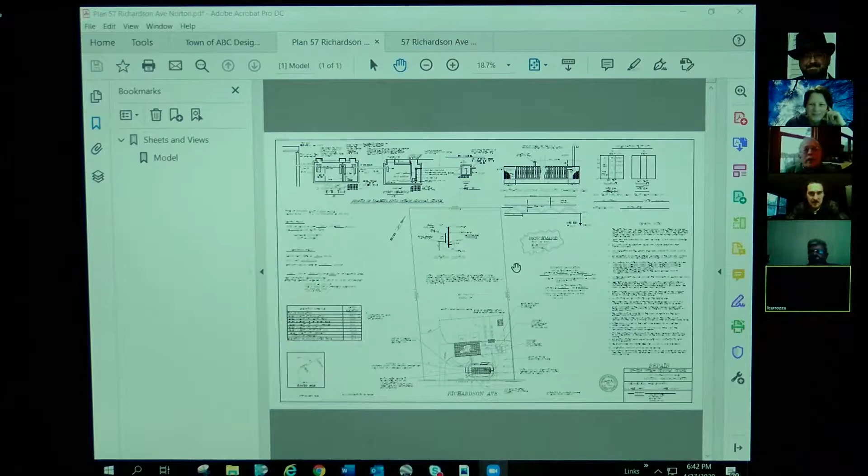It worked a little better last time. Did that work? Oh, there you go, there it is, there we go. All righty, very nice, thank you Lisa. Hey, sure thing. All right, I'm just trying to zoom in a little.

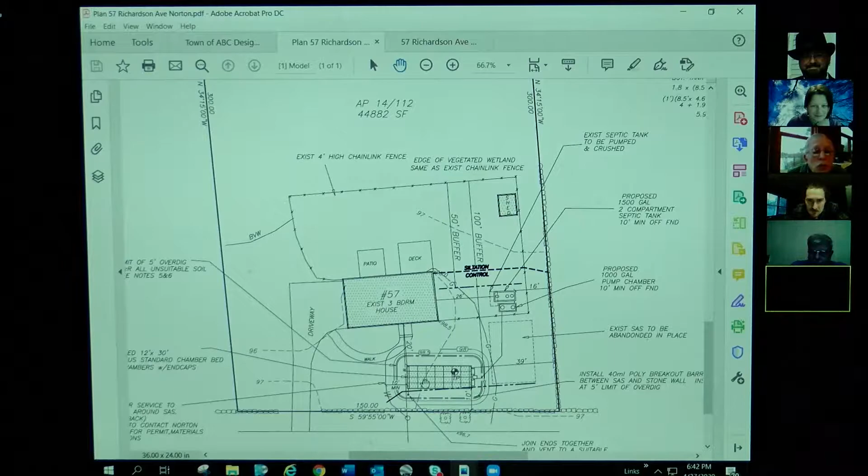So it looks like the wetland is along the fence, along the back of the fence, and then it comes to here. The existing system is here. The leaching fields are going to be replaced in the front. Siltation control here.

So if I can just comment, the wetland is off to the right, off to the left as we see it on the plan. This is the only thing that says BVW, then there's a note that says it's coincidental with the back of the fence, I assume is back here. Yes, I see.

But I see these two lines here, 50-foot buffer and 100-foot buffer, what do those refer to? So they're measuring from the fence. I don't know why the 50 foot, but they did a 50 foot. Can you hear me? Yep. Yeah, the 50 foot, I put the 50 foot on every town. Some towns want 50 foot, so I just showed 50 foot.

So just so you know where we're at, the 50 foot and the 100 foot, the leaching, everything is within the 100 foot. The leaching field is about 90 feet off the wetlands, and the tanks are about 55. So this is the buffer, 100 foot buffer from the fence. Yeah, it's a fence, it could be further in, but over the years they've maintained it, so it is the fence, in my opinion.

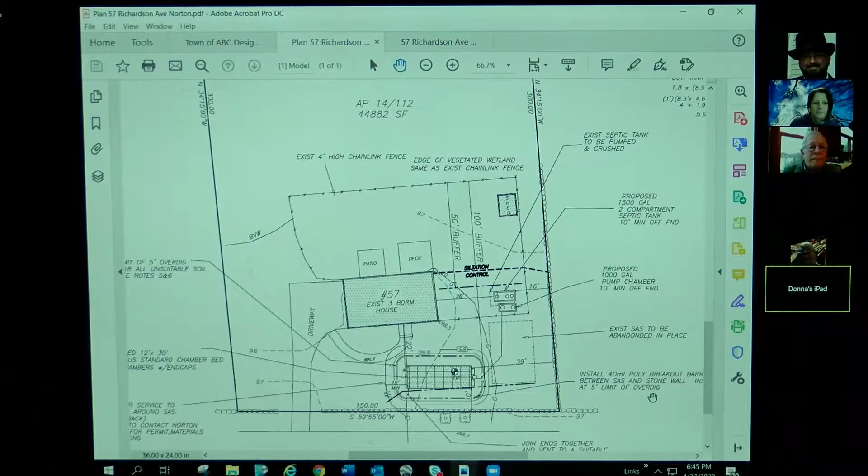Siltation controls are not really needed here. Is that what anybody else is thinking? No, they should have sediment controls. Oh, I see, it's installed there. Yeah, it comes here - I'm just showing a silt sock along from the stone wall on the side to the back of the house.

The actual work is probably going to be less than a week, but at least it will be there in case any rainstorms come up. In case they have to stockpile any material they excavate - in this particular case, there should be no stockpiling since they have to take it out. They have to replace some of the stuff in the front with sand, so they're just going to put it in trucks and take it away back and forth. But you're right, it's there in case there will be a little piling from when they put the tanks in.

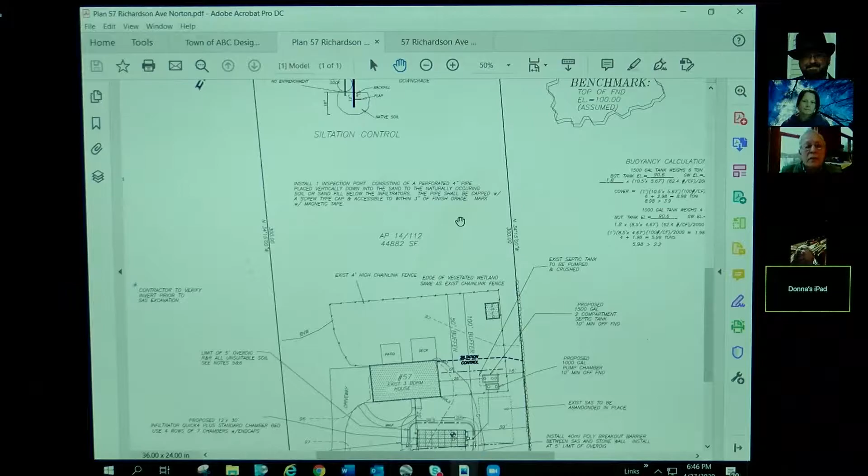Jennifer, do we need to see the photos of the site? Are we all set? You could put those up. If I knew how - wait a minute. You stop share first. Do I have to do that every time? Really? That's annoying. Okay, do you want me to try it?

Hold on. So wait a minute, where did that picture go? Oops, that's not it. Giving away company secrets. Is that - there we go.

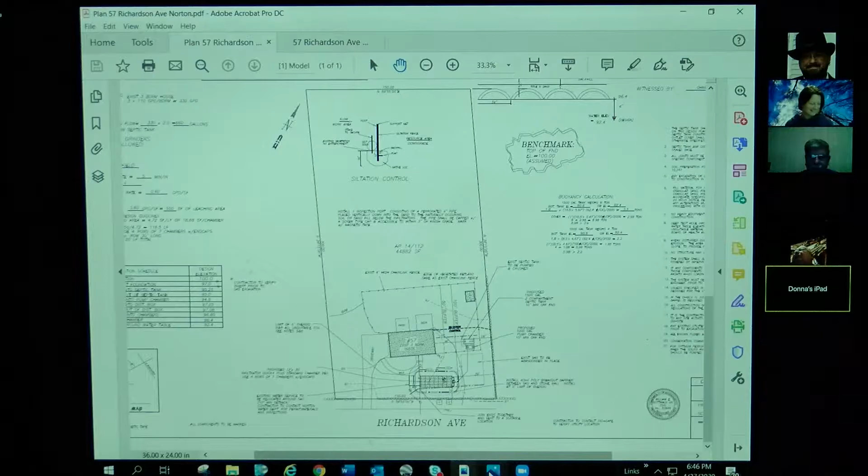All right, so I need to ask if there are any members of the commission with specific questions. Dan Doyle, any questions? I do not. And Ron? No questions. And Gene, any questions? No, not at this time. All right, and Dan Pearson? No questions. And Lisa, I'm assuming you don't have any further questions. All set.

All right, so we do have a number - it seems to be not terribly complicated. Is this something we can consider closing at this time?

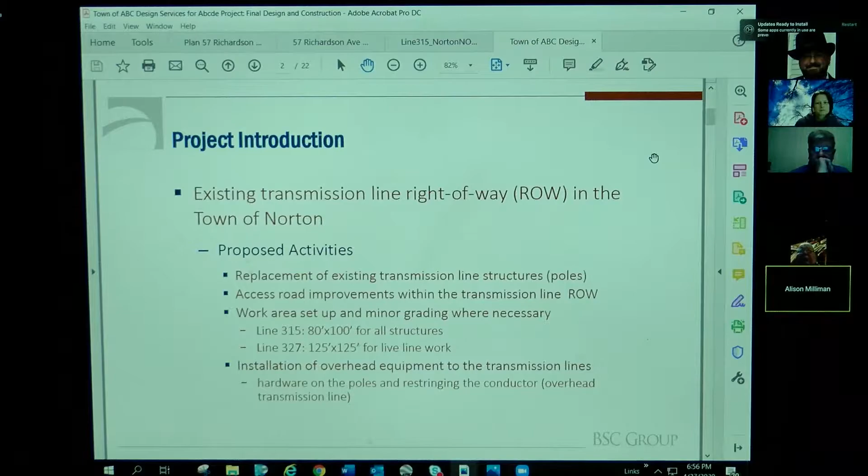Here I've just provided a screenshot to demonstrate what the existing transmission line right-of-way looks like as it crosses through your town. This is a shot of the transmission line right-of-way from Harvey Street.

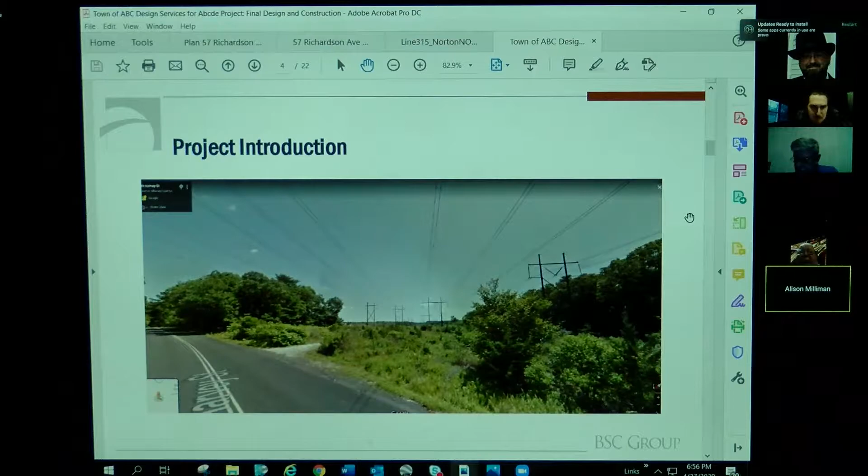Are these concrete footings or piers? Yes, certain structures are required to be installed on larger concrete foundations. Those are the dead end structures - they need to support more overhead strain. There are also angle structures. When we get to the plan set I can point out where those are in your town. I was wondering, do those come precast? No, they need to be poured on site. That's part of the reason why we have some access road improvements - they may need to refresh the stone entrances because they'll need to get concrete trucks in there to pour those.

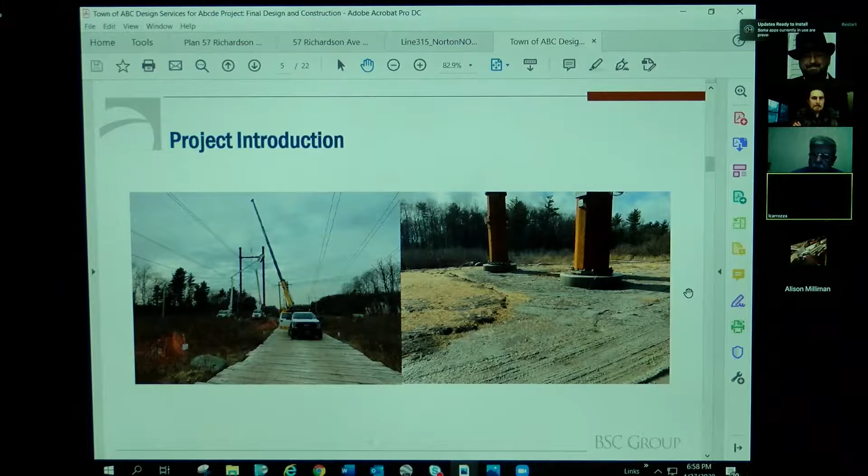Project activities are proposed within resource areas regulated by the Wetlands Protection Act and the Town of Norton Wetlands Protection Policies. We have work occurring in bordering vegetated wetlands, 100-foot buffer zone to BVW, 200-foot riverfront area, bordering land subject to flooding, and the local 25-foot no disturb zone.

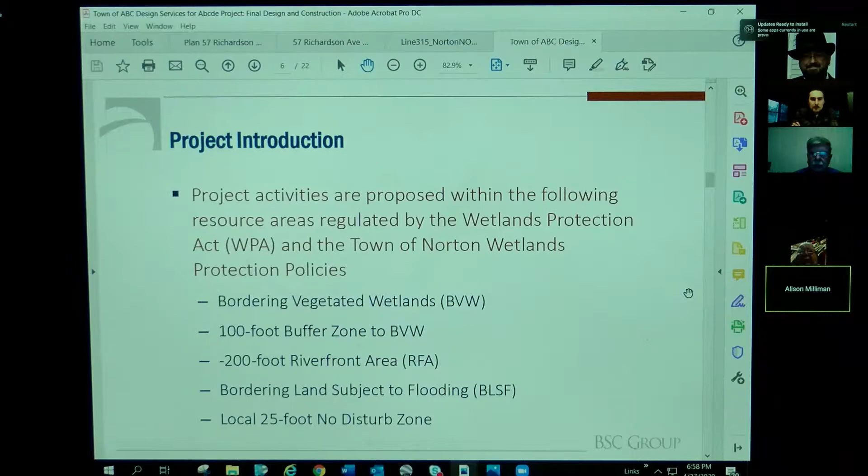Project activities are expected to commence in summer 2020, pending receipt of all necessary permits and approvals. We've gone out and reflagged the wetlands on the project right-of-way. The first activity after we receive our permit will be vegetation management - mowing overgrown access routes and around the base of the poles to allow for construction access.

After that we'll install the perimeter sediment controls as shown on the project plans. They'll install construction mats where needed for access through wetlands, do any necessary grading or road refreshment, and any necessary spot grading around the base of structures to make a safe, stable platform for construction equipment. They'll complete construction activities, remove all the matting, and restore the right-of-way to pre-existing conditions to the extent practicable.

We do have some road improvements, so some areas will be refreshed a little wider, as shown on your plans. But all other temporarily disturbed areas will be restored. After we achieve 75% vegetative cover, we'll request to remove our sediment controls from the site.

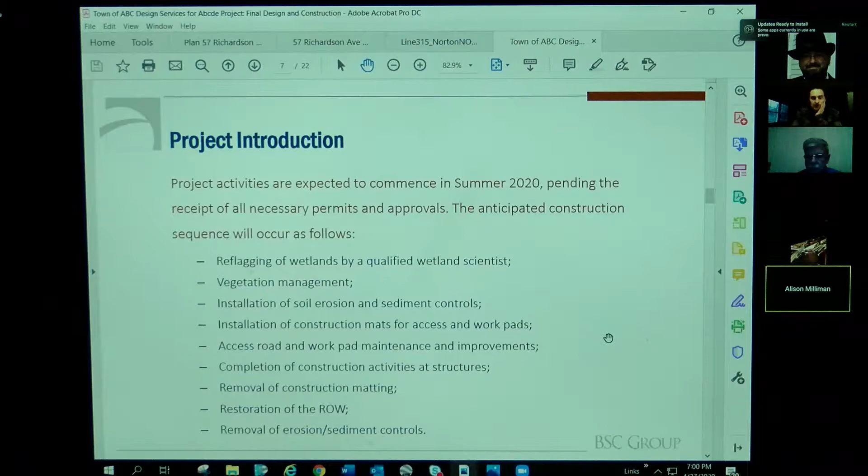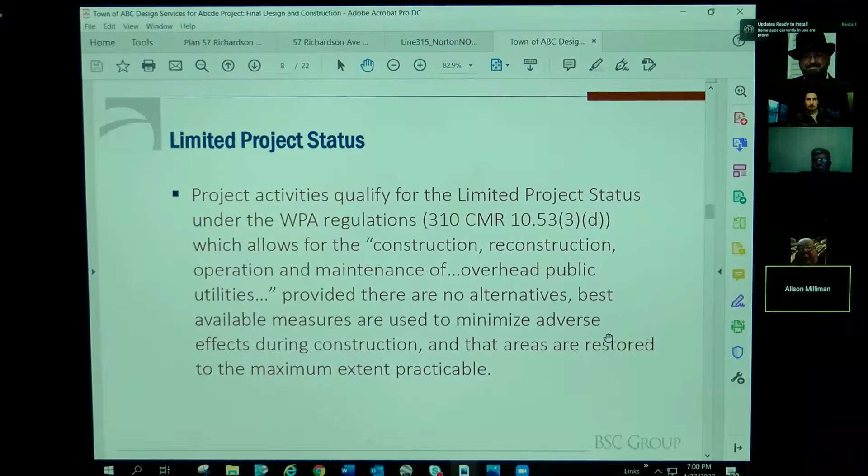This project qualifies under limited project status under the Wetlands Protection Act regulations because it allows for construction, reconstruction, operation, and maintenance of overhead public utilities, provided there are no alternatives and best available measures are used to minimize adverse effects during construction, and areas are restored to the maximum practical extent. I'll add that it's a limited project because they can't meet performance standards of no alteration of a wetland within an area of critical environmental concern, and that's the section that allows them to go forward with that.

The project is needed because the transmission system was largely constructed from the 1930s to the 70s, so we're dealing with aging infrastructure. The 345 kV transmission system integrates the region's power supply resources with load centers. Ground line asset condition inspections and aerial inspections completed regularly over the past 10 years have identified deteriorated wood poles on this right-of-way.

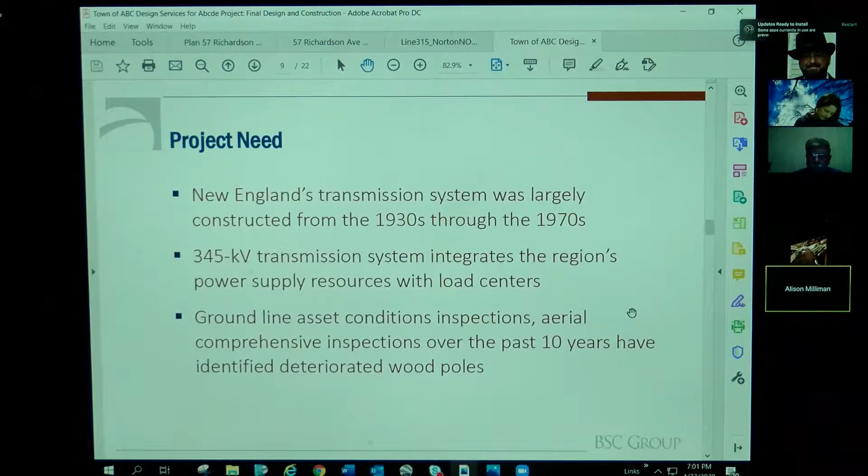They need to maintain the infrastructure and do system improvements to mitigate potential risks to the public from electrical failure and provide reliable delivery of electrical service. There are also some locations with audible noise issues - these upgrades will fix those, so abutters won't hear that buzz or hum sometimes heard near transmission lines. Lastly, they'll upgrade the optical ground wire, an overhead circuit providing high-speed communications between substations, so if there are emergency situations or outages, they can respond quicker.

Our Wetlands Protection Act Form 3 disclosed our permanent and temporary impacts to areas regulated under the Wetlands Protection Act. We have permanent impacts to bordering vegetated wetlands associated with increased footprints for certain transmission line structures. We have one structure replacement in bordering land subject to flooding, which will result in 1.6 cubic feet of flood storage lost, which we will mitigate or replicate in kind.

There's 9,781 square feet of temporary impact to isolated land subject to flooding associated with installation of temporary swamp mats. And then 157,356 square feet of impacts to riverfront areas associated with access road improvements and work pad grading.

That's actually the total riverfront area on the whole site, not what you're actually altering. The alteration is 3,000. Oh, right, thank you for correcting me.

We have unavoidable permanent impacts proposed to bordering vegetated wetlands because they're associated with replacement of existing structures already located within those resource areas. There's one structure they're proposing to replace with larger concrete foundations, which was the photo we discussed earlier. In total this results in 481 square feet of permanent impact, which we are proposing to replicate in the right-of-way.

Throughout the transmission line right-of-way, we have temporary impacts associated with construction matting put down to gain access to existing structures. After the project is complete, they'll pull those mats out and we will monitor and document in situ mitigation. Since the matting gets placed directly on top of existing vegetation, it typically just regrows from the existing root balls and seed stock.

What's the period of time that you go back, once or twice, or seasonally, to make sure it grows back?

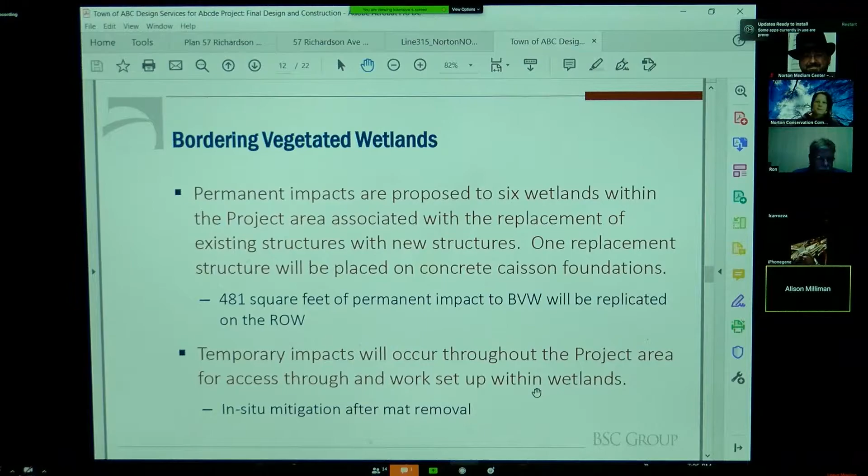We will continue to go back until it achieves 75% vegetative cover or pre-existing conditions. And if after one growing season we're seeing issues, maybe if the mats were put down during the growing season and things didn't come back as fast as we would like, we would amend with a wetland seed mix.

We have one structure replacement in bordering land subject to flooding, which will result in about 1.6 cubic feet of floodplain fill. Although it could be considered de minimis, we are proposing BLSF replication of 1.6 cubic feet at the same elevations as where it will be filled. Therefore, the project will not result in a reduction of flood storage capacity.

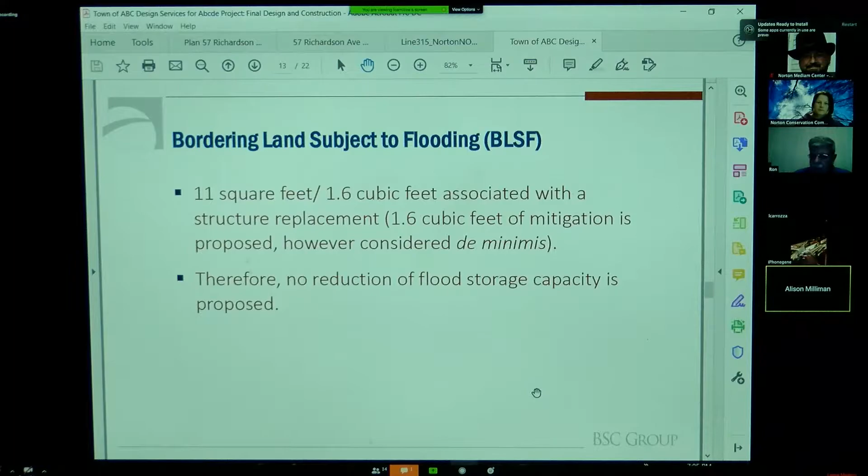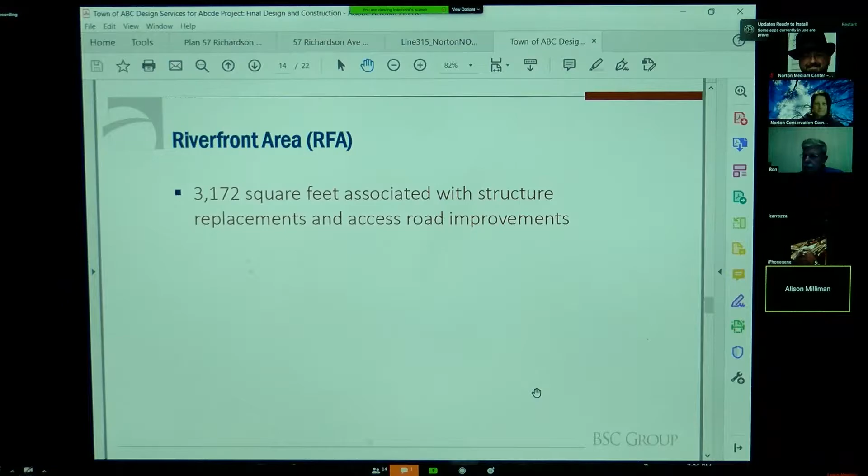As discussed, the much lower number is 3,172 square feet of impacts in riverfront area associated with structure replacements and access road improvements. In the 100-foot buffer zone, approximately 28,447 square feet of disturbance is proposed associated with structure replacements, access road improvements, and some minor graded areas for work setup. Those work setup areas will be restored and vegetated after the project is complete.

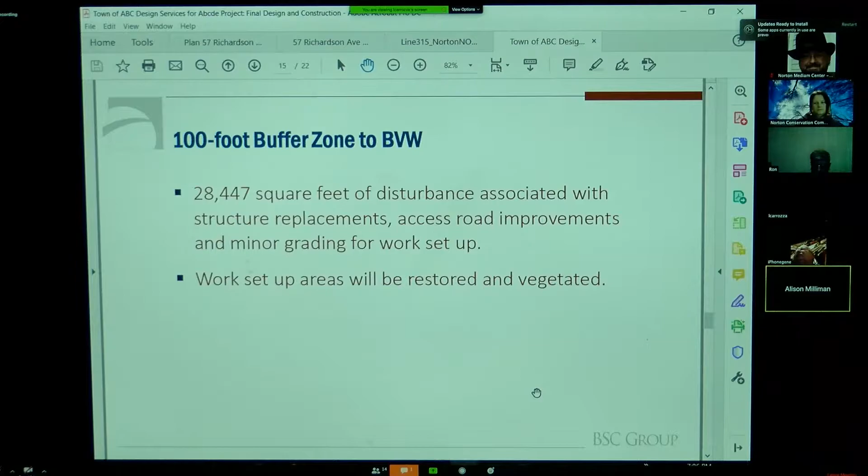Although the project meets the criteria to be considered a limited project, it has been designed to meet all applicable performance standards for each affected resource area. The proposed project will implement BMPs to ensure adjacent resource areas are adequately protected, and impacts to the surrounding area are reduced, minimized, and restored to the maximum practical extent.

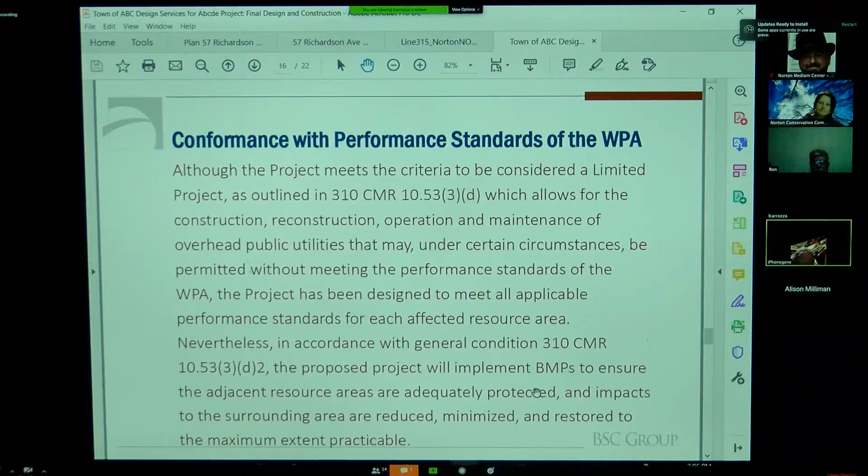We're proposing one-to-one wetland replication for permanent impacts to BVW, therefore no net loss, and one-to-one flood storage capacity replication. All work within NHESP priority and estimated habitat will conform to the existing operation and maintenance plan. Certain project activities will require a conservation and management plan, which we are reviewing with NHESP staff at this time.

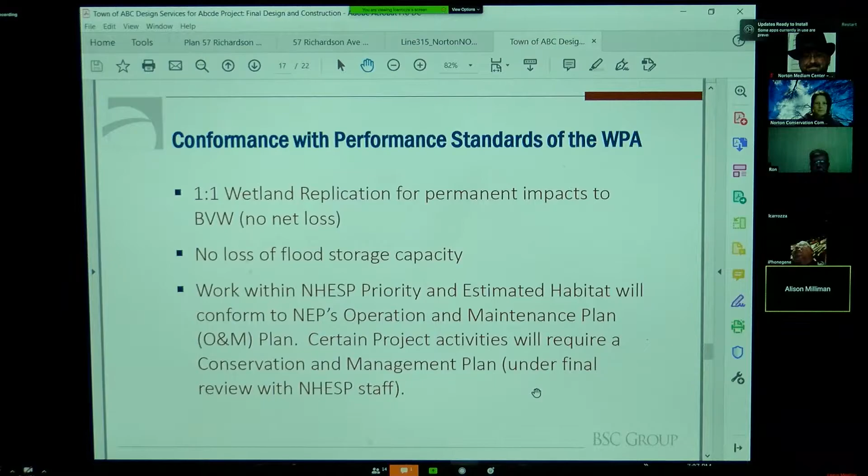All the work within these areas is already occupied by existing transmission line structures, so it does not result in new disturbance to otherwise undisturbed portions of the riverfront area. In fact, structure 190, located within the riverfront area associated with Goose Branch, will be moved further away from the bank of Goose Branch. We are not proposing any significant change in grade or impervious surfaces in the riverfront area, and the area of proposed work is less than 10% of the overall RFA on the transmission right-of-way.

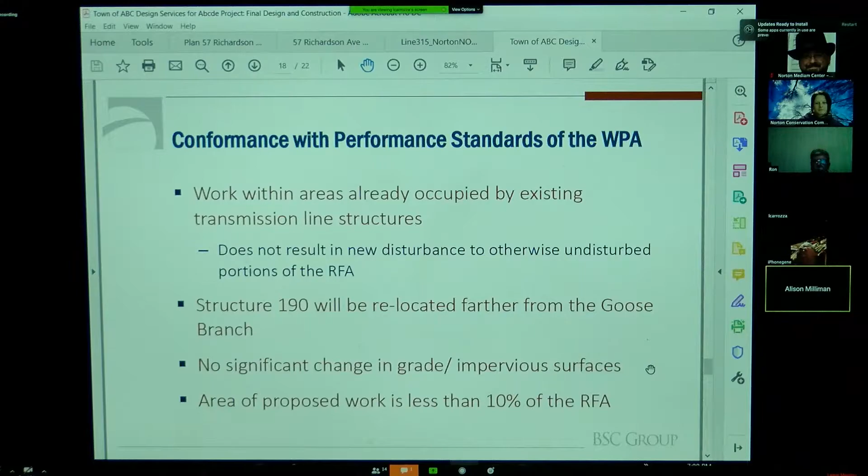To reiterate, we commit to installing sediment controls as shown on the project plans. Erosion controls will be installed, such as blankets if deemed necessary. We will install stabilized construction access to prevent off-tracking onto public roadways, and adhere to strict vehicle refueling and maintenance requirements, so those activities happen at least 100 feet from wetland and bank, on impervious surfaces or at the laydown yard if possible, which is where we prefer those activities to happen.

We discussed at the last hearing a question about refueling some of the larger equipment, like the drill rigs and the cranes.

They will be staged on the matting in the wetlands, so those can't really be moved easily to allow for any refueling. In those circumstances, we use secondary containment, such as a kiddie pool, plastic tarps, things like that, to make sure there are no drips or leaks during refueling activities.

The mowing activities will occur in place. No brush or chipping debris will be moved around the right-of-way. This will limit the spread of potential invasive species.

All materials that will be stockpiled on site will be encircled with straw bales or other proper BMPs when they're within 100 feet of a wetland.

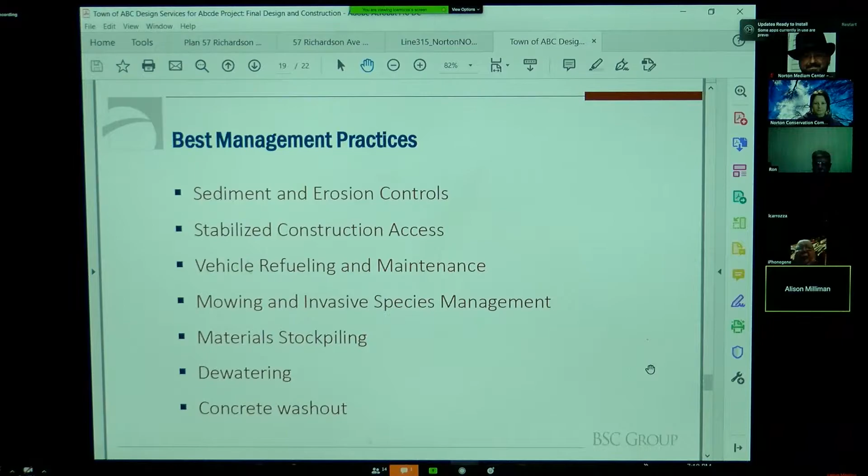Now we could do a page turn of the project plans, similar to what we did last time. I'd like to point out, as Jennifer recommended, where we addressed comments from the commission during the original page turn. The first comment was that the floodplain was not shown on the plans, so the floodplain layer was added to the legend, shown on pages 6, 7, 9, and 10.

All right, let's see what it looks like. I assume it's right here, the blue shading. Yes, okay, good. It's a static legend, but that's where it applies to the maps on those pages.

On page 5, we added the call out for the square footage of the wetland replication area.

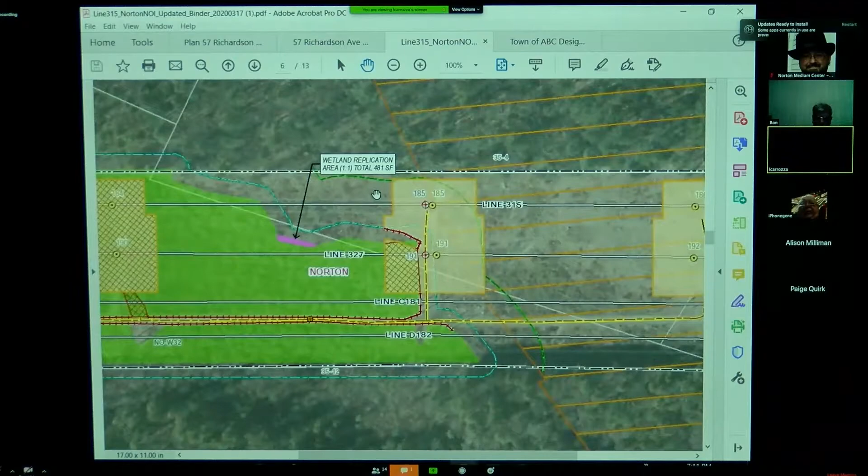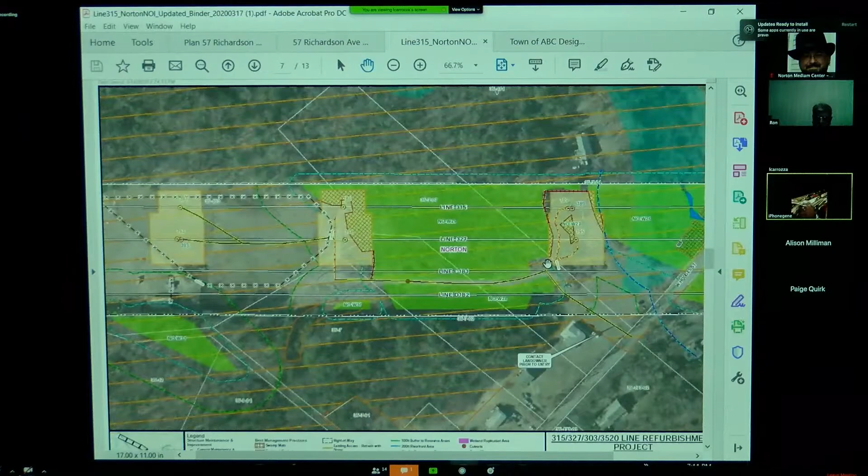On page 7, we corrected the call out for access off the right of way from Harvey Street. It originally said Harvest Street.

We also added perimeter sediment controls on the upper left side of the page to address the potential access route along the southern edge of the right of way where it passes three isolated wetlands.

And Alison, this is the spot where we're spanning the stream, right? Do we want to talk about the closed system here? Yes, I understood that there was a request that we make sure that our matting is a closed system so that we don't have any sediment falling into the water courses. I asked if we could just put that in the order of conditions.

Okay, so it'll just say the matting will be a closed system? Is that what we're writing down? Let's see, there was some good language.

I have your notes here. Is that up in here, Jen? Nope, go down a little bit. Keep going a little bit more. And then, yep, keep going to the right. There's the red line. Oh, this. Right here?

Yep, okay, stream span, that makes sense. And I think in that location, can you use the heavy duty plastic mats, the ones where there's no gap at all, as opposed to the wooden ones?

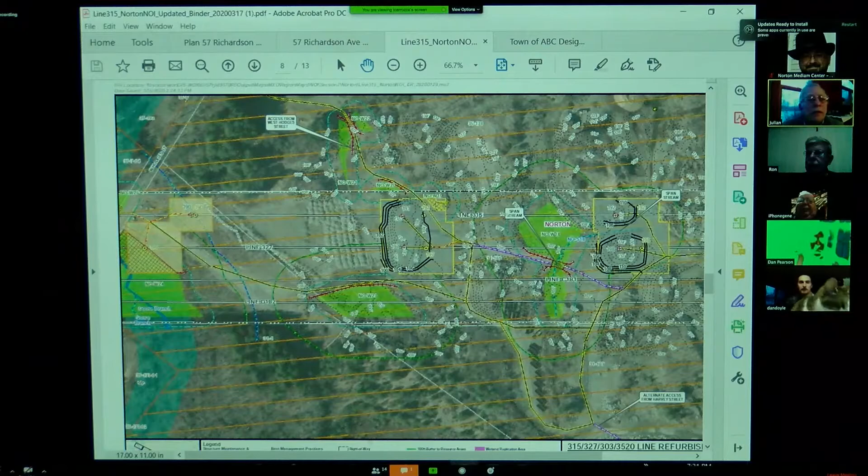Dan Doyle, did you have a question? I'm recusing myself. All right, so is there any further information needed, other than we have to allow 2 weeks for other people to review the meeting and perhaps submit questions? I don't have any other questions.

So while we don't have any further information to be presented, we can continue this and then presumably close and issue the orders at our next meeting. Correct. All right, so I assume the applicant is agreeable to a continuation, I think it's May 11th?

Correct. And just to understand, that's only for the opportunity for the public to comment, right? Yeah. May I ask, please, that if there are no additional comments from the public, that we could issue the order at that hearing? I think that's the plan. Yeah, that's correct, that's what we intend to do.

Okay, thank you. All right, so I can entertain a motion to continue this hearing until May 11th. So moved, I'll make that motion. All right, made by Ron, seconded by Lisa. All those in favor say aye. Aye. Those opposed? Motion carries.